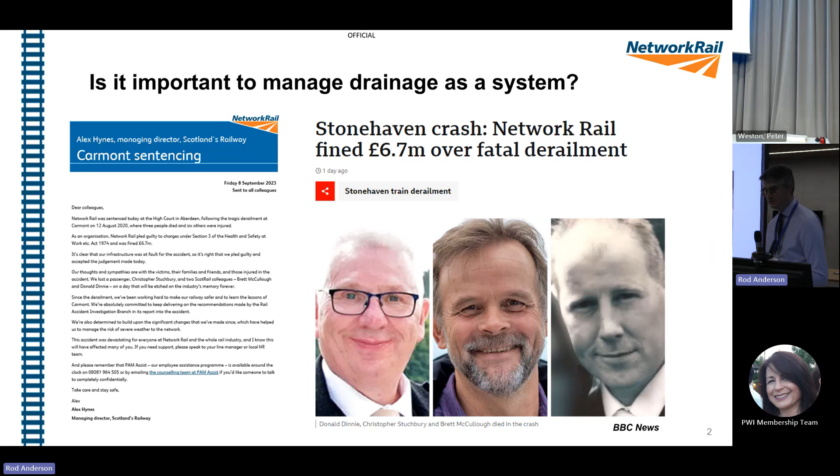So the accident - unfortunately, train 1 Tango 08, which was an HST travelling between Aberdeen and Glasgow, hit a pile of debris. Now, I'm not going to go into this because we are running slightly shorter on time, but the crux of it is 3 people lost their lives. The train derailed on material that had washed out from a drain.

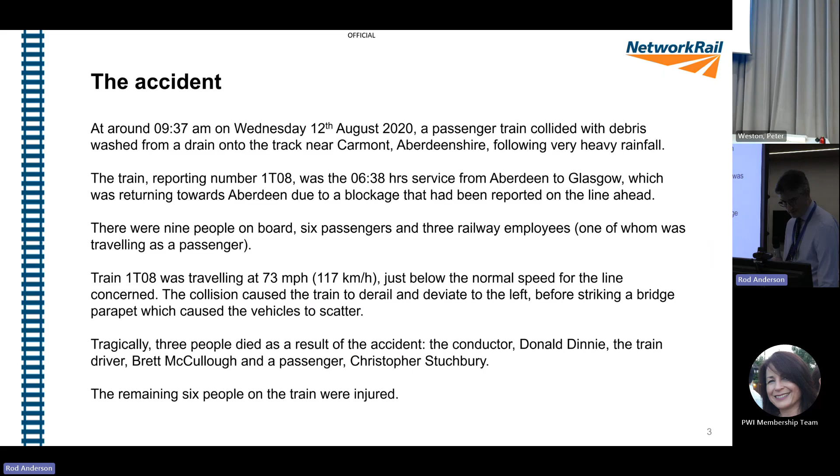So an area of the asset that's close to my heart - drainage is responsible, and it doesn't... I'm not proud of it, and it makes me awkward every time I think about it and talk about it. And it should remind us that it is really, really important that we manage the drainage asset properly. We inspect it, we maintain it, we renew it.

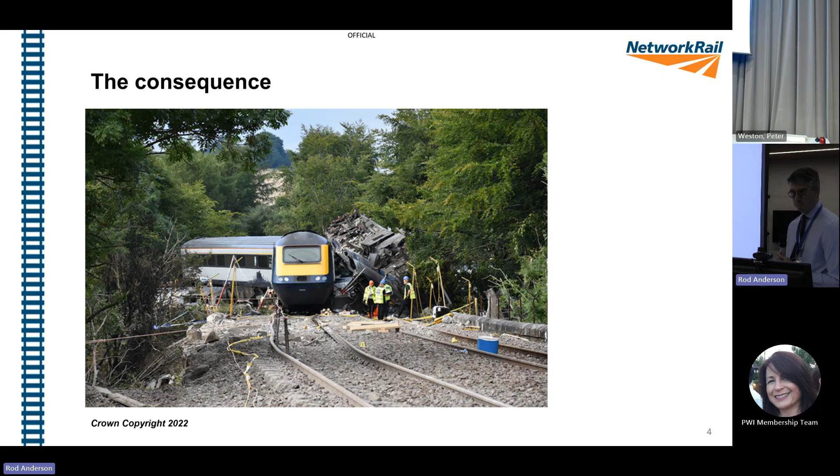So this is the power car, the rear power car. You can see what happened there. We had a couple of pictures earlier in the ORR presentation. That's the train in several bits.

It derailed on something that was relatively small. So you think, okay, we got the track there, we got the 2 rails, couldn't have caused that much damage. You notice in there that we've got ballast on the right-hand side, which is the coarse granite material that holds the track together and provides the support. And we've got smaller stone in the middle, in the four-foot, the middle of the track as we call it.

That is all of the shingle, that's the pea shingle, the pea gravel, that's come from the drain. That was at the top of the cutting. So the whole accident, the whole loss of life, the whole problem here is shingle that washed out from a drain. That is something that I'm not proud of, but it's something that we must talk about and we must share.

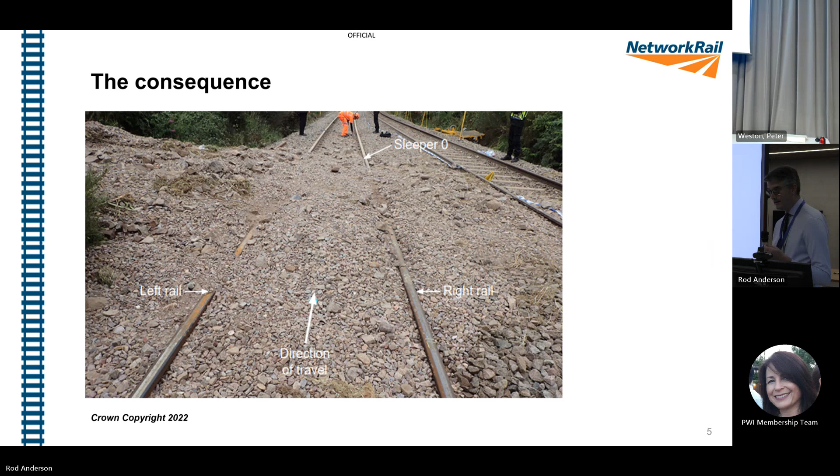And if it encourages you to go into a career in railway engineering, drainage systems, drainage asset management - doing all of those things right, doing the things that we heard about at Lewisham, correct maintenance of the geometry, correct inspection regimes, having things in a register - they stop these kinds of things happening. So really, really important.

That is what the scene looked like when the RAIB turned up on site, about an hour after they had the report of the derailment. You can see just how much material has come down from the top of the cutting slope. The driver wouldn't have stood a chance. They would have come around that corner and hit that debris. So it is really, really important that we think about the whole system.

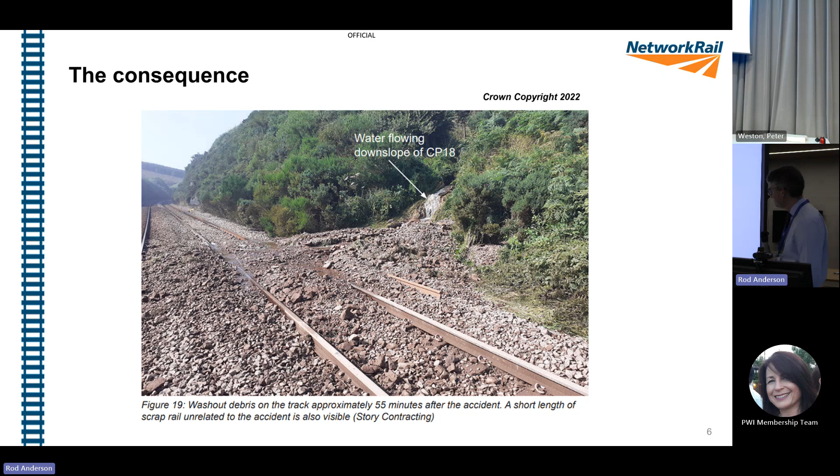I'm just going to go through a couple of the key engineering details because we're a room of engineers, hopefully. Same in Sheffield.

We had a drain installed by Carillion, no longer with us, in 2011. That had been installed not in accordance with the design. We often think about designs, and we had AECOM, we've got Atkins in the room, consultancy firms that do proper verification. They look at levels, elevations, all sorts of things that help us manage the railway system safely. This drain, for reasons that are now known, hadn't been installed correctly. So we ended up with material on the track. We had a very steep section at the top of the slope, and that ended up with material down on the track.

Designs are great, but we've got to take that ethos of looking at the system, understanding all the various elements and parts of that, into the construction.

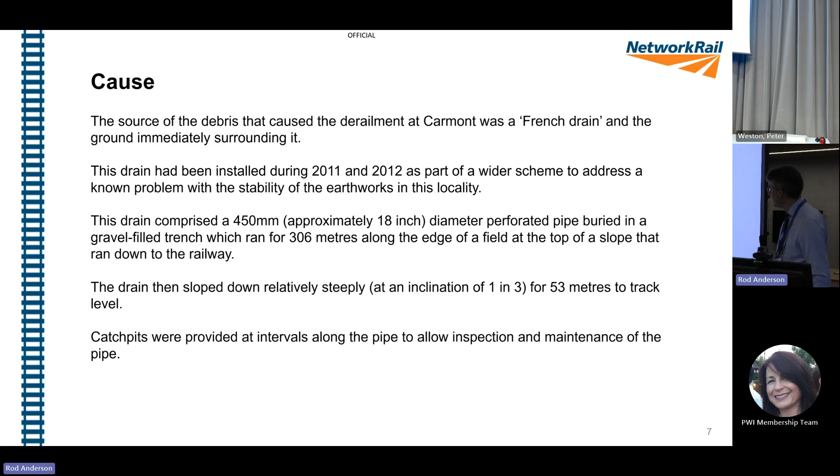So if anybody gets involved in construction, the next slide is really quite hard hitting. That is what they found at the interface between the top of the drainage system and the slope where it went down to track. Now, you'd think that's been under granite, ballast, shingle, in the slope - no one will see it, right? It's buried, yeah? No problem.

That's now in the RAIB report. That's been seen by HSE, ORR, just about everyone in this room, everyone in Sheffield.

If stuff changes on site, we've got to make a point of recording it. Change is inevitable in life. Today, this event, we've had to move the speakers order around a little bit. Things change - that's okay as long as we communicate the change. So if I could implore everyone in this room and in Sheffield, in your careers, whatever happens, whatever designs you get involved with, whatever construction work you do, whatever assurance you do, make a record of it. And if it changes, it's okay, we just got to record it.

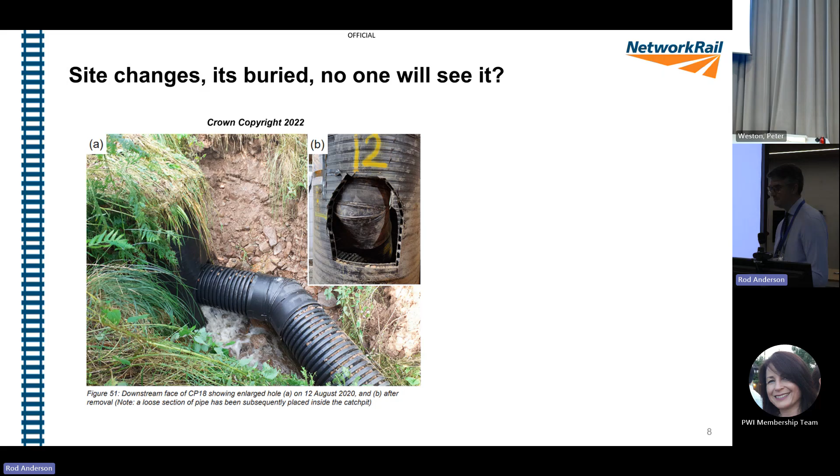It's really, really quite sobering. But all of these things that I've talked through in the last couple of minutes are things that you can take forward into your careers if you choose rail, and I'd encourage you to do that. These are things we can take forward and we can make a difference. We can change things. We can stop these things happening.

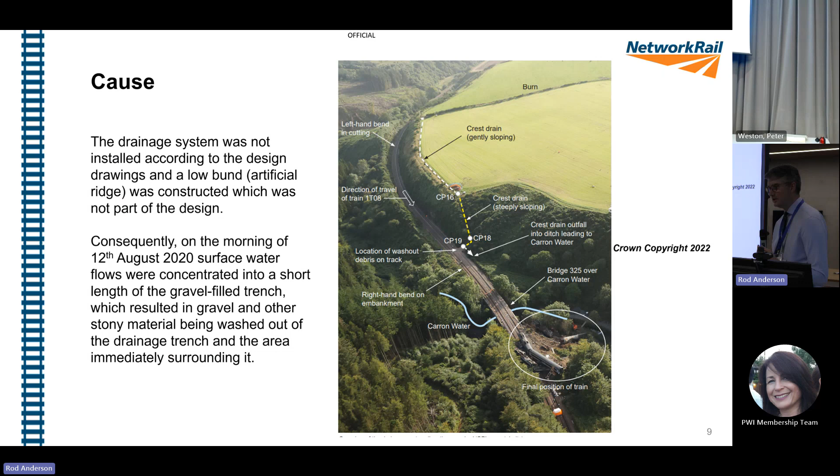RAIB, we've heard RAIB mentioned. If anybody wants a bit of CPD, anybody wants to look at learning from things that have happened in the past - and that's what I encourage you to do - Rail Accident Investigation Branch reports are a really good thing to do.

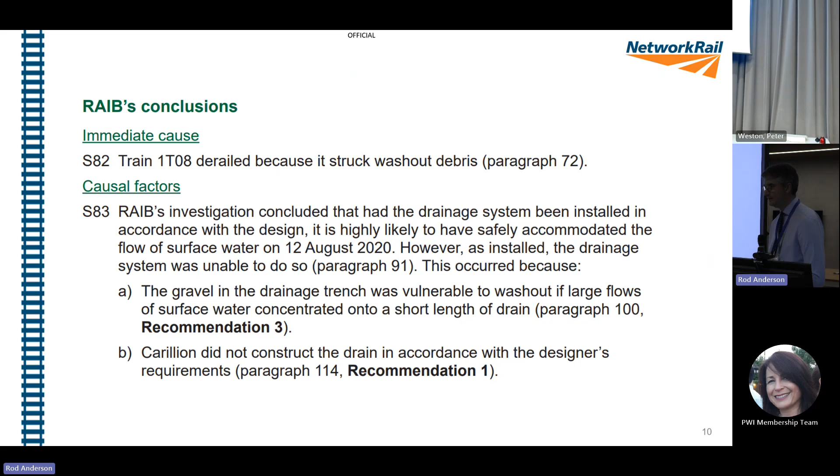It struck debris - that's the outcome of this investigation. It struck debris. So we installed the drainage system incorrectly, and Network Rail wasn't inspecting all of that drainage system. So really, I'm going to focus on one area that's so close to my heart, and I talk about it all the time: the system.

So we talk about drainage - I've talked about drainage for a few minutes now. We've had some track engineers in the room, that's great. We fail sometimes as an industry to think about the system. So what we've really got to focus on, and it's why I'm here, it's one of the reasons I talk often about this, and it's why I'm a member as well - this is the big picture. There have been workshops done on this, but we've got to think about the system. So if you're a track engineer, your interventions could have a huge impact on the earthwork.

Vice versa, if you're an earthworks engineer, your interventions could have a huge impact on the drain, on the track. So we really got to think about the systems interface. When we do that, I think we're on to a winner. Systems are really important to me.

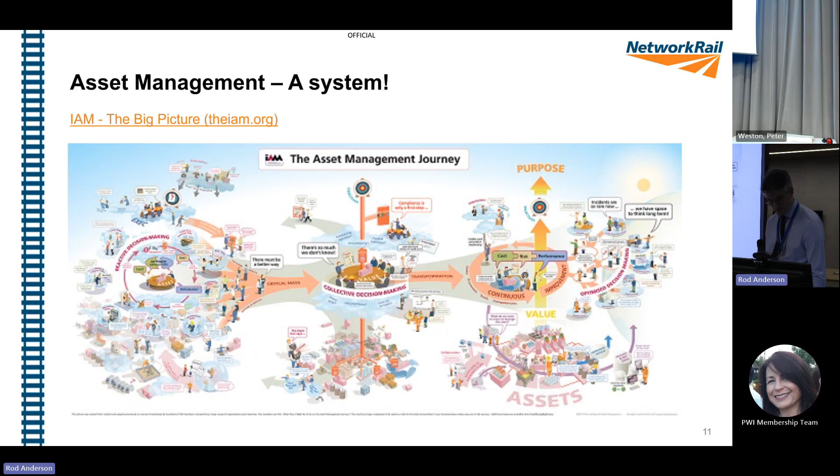I just wanted to share a few pictures from what we do, a typical day in the life. Brian was asked earlier what a typical day looks like - this is perhaps my version. That picture on the right is a drain. Believe it or not, it's full of ballast. It's collapsed. We had to find it.

We've got these lovely new machines that make stuff a lot easier. We did do an awful lot - even 10 years ago we were doing a lot by hand. We're now doing much more in terms of mechanization, which helps manual handling sufficiency as well. The ORR, as you heard earlier, want less money, less time, less access. These kinds of machinery can really make a huge difference to what we do.

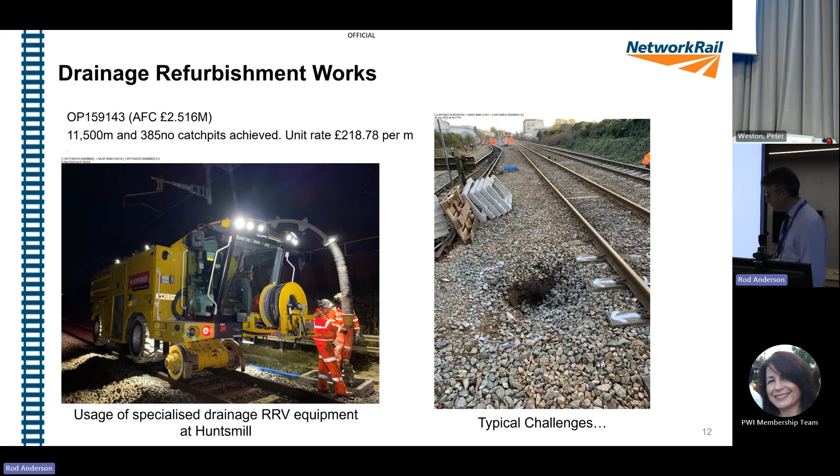And renewals, of course - we have an aging infrastructure, we have to renew things. So this is just a couple of examples of where we put new drainage in. Kind of gives you some idea of the cost there, just a broad brush - 708k for one of these jobs.

So we're spending that money that the ORR agrees with us in the determination wisely. It is a challenge on occasion - we have limited access, we have old infrastructure, we've got designs to do. These were designed by AECOM, by the way, just a plug there.

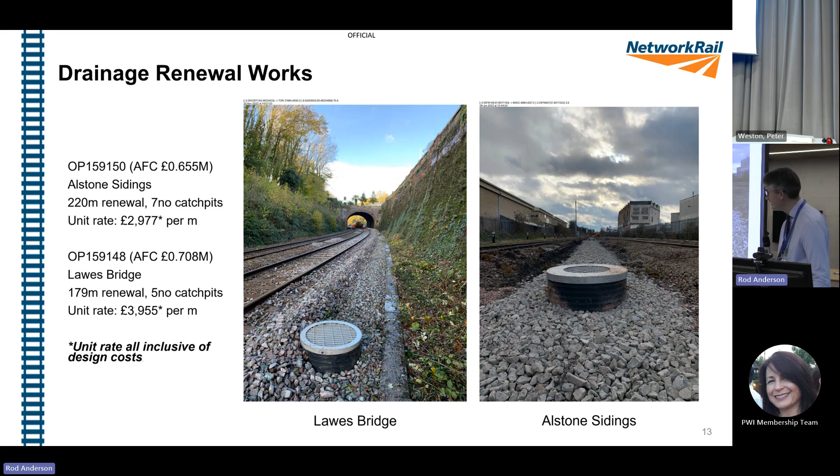The last thing that really gets me, and it's where I started - I've been in this role for 12 years. Three years prior to that I'd been doing drainage inspection, drainage maintenance, track maintenance. Maintenance is absolutely the first and last line of defense, and we forget the importance of inspection and maintenance at our peril.

So there are track engineers in the room here, and there are people in Sheffield involved in maintenance in some way, shape or form. Spending some time in maintenance at some point in your careers, whether that be railway or somewhere else, it's worth it - it's a real eye-opener. You get very limited chances to do stuff, but you can get stuck in.

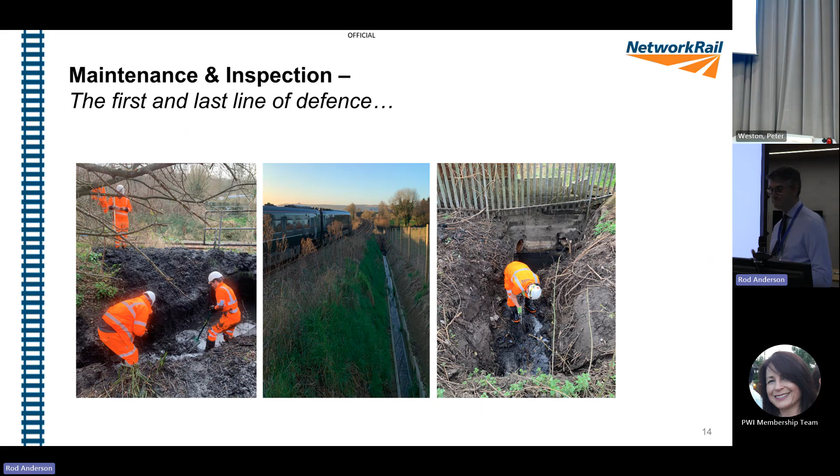That was just a little run through of Carmont, a reminder of why it's important to manage drainage as a system, and a bit of my background. Happy to take any questions - there's a couple of videos on the back of there.

Thank you very much, Mark. Thank you. So I don't know if we've got any questions here - first of all Stephen, please, from Sheffield. No questions here, so I don't know if we've got any questions in the room. I think we've lost everyone. Have a question from Greg?

Sorry, in CP7 - has the budget gone up for drainage renewals, improvements and maintenance? It has, yeah, substantially. The focus from the business, from the ORR, from others has been that actually we've forgotten this thing called drainage, so we are about 30% more in CP7 than we were in CP6.

It's never enough, we need more, but the biggest thing we've seen is a change of tact from reactive to proactive. It's not everywhere, it's not possible - we're not funded to do proactive interventions at every site, but there are more and more sites where we're proactively intervening. Money in terms of renewal spend has gone up, so that's a huge positive, and it's one of the reasons I've hung around. I want to see this through, I want to see the journey. It's a great place to work, there's a lot of money in drainage. So yes, it has, Graham.

So our penultimate presentation now, we've got two speakers from a completely different discipline. Some of it is related to civil engineering, but most of it is about electrification. So we've got Simon Skinner, who is the engineering director for SPL Power Lines, and Lucy Clark, who is a recent graduate with a few years experience now since graduation. They are mostly going to be talking about their experiences on Midland Main Line.

Okay, thank you, Simon. Joan. Yeah, hi, the slide's just coming up. So to introduce myself, thank you Joan. I'm Simon Skinner, I'm engineering director for SPL.

I've been with SPL for 7 years. I've been working in the railway industry for about 25 years, I am that old, pretty much just in electrification. So I started off in a design organisation, then got bored and moved into construction, then went back to design, then went back to construction. I've ended up delivering multiple projects in my career. The current project that we've just delivered is about 200 million.

My first senior role as an engineering lead was what's called a CEM, Contractors Engineering Manager. I entered into service about 320 million pounds worth of electrification, and that's a complete rail systems project. So that's...

Right, anyway, he's got the slides up. So that's me. I'm a chartered engineer through the IET. I'm also a fellow of the PWI and a fellow of the IET. And Lucy's going to introduce herself later when she gets to her slides.

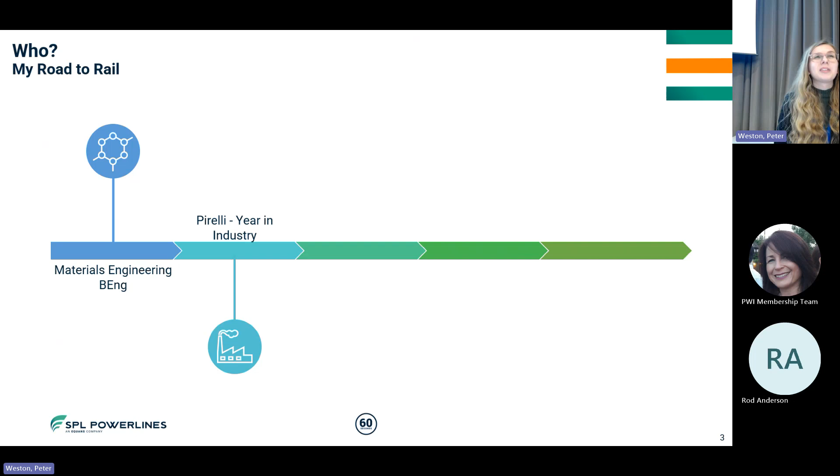As part of my course, I had a year in industry placement and applied to companies recommended by my university. I worked at Pirelli Tyres for a year in one of their rubber mixing factories as an efficiency assistant, which involved looking at production data to work out where we could reduce lost time. Although I wasn't particularly a fan of the industry, I did enjoy the nature of the work.

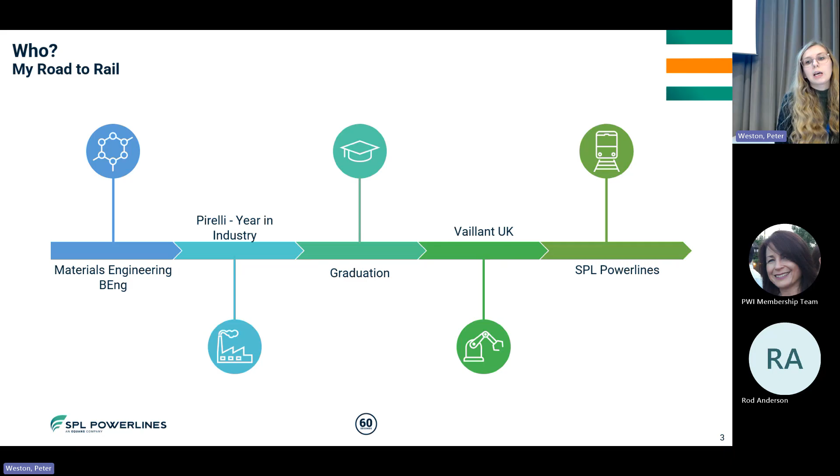I went on to graduate in the middle of COVID, so I was looking around for jobs and found an opening at a company close to me, Vaillant, who produce boilers. They'd introduced a new robotic cell to construct boilers and needed CE marking, now UK CA marking, to commission the cell. I did that for a year and got experience in engineering assurance, which allowed me to apply for roles at SPL Power Lines, where I now work as an assistant engineering manager.

When I started in railway, I didn't have any idea what was involved in railway electrification. I had the general idea that it was the overhead line equipment, the OLE, that powers the trains, but I didn't understand there are so many interfacing disciplines involved. A few of the major ones are route clearance and track, which Simon will mention later - you often have to lift or move these to get the OLE wires through. There are also substations, which Simon mentioned, to power the rail, and some work in signalling, immunisation and signal sighting that I'll talk about a little.

In all these disciplines there are also lots of different areas you can work in. There are the design teams, which do all the calculations needed for the design of the OLE or the bridges, and the construction teams that go out and physically put these on site. There are loads of areas you can work in - environmental teams who do surveys and ecological studies and look at reducing carbon in projects. But I mainly work as part of the integration team, where we look at all the interdisciplinary designs and do interdisciplinary checks to reduce clashes.

We work closely with the information management team because they hold what's called a federated model, essentially a big 3D model which shows what the railway looks like currently and has all the 3D designs of the new infrastructure placed in. This is really useful for early clash detection, to make sure you're not putting an OLE mast in a trough route, or to look at potential risks like standing surfaces.

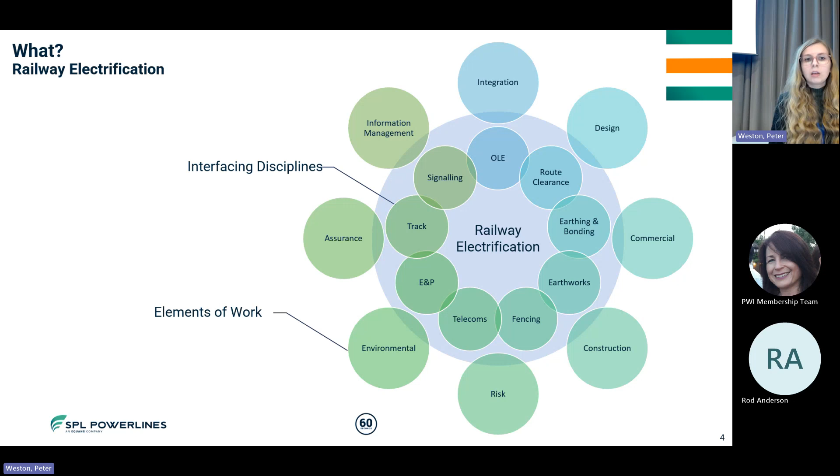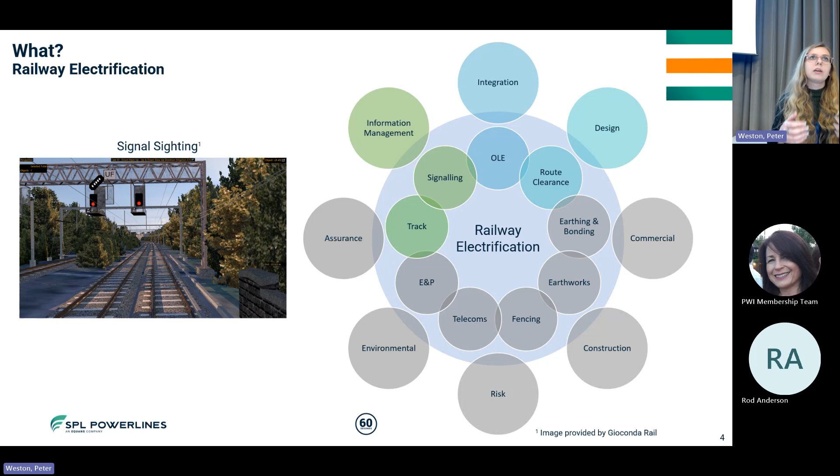One area I work in that we use this for is signal sighting. Drivers require a certain amount of time to see a signal to safely act on it. We run through the 3D model to check that new OLE designs or bridge moves don't impact the sighting of these signals, so it will still be safe to run when commissioned. This saves a lot of money because design changes can be made early in the process, and it reduces the number of people we need on site to do these checks at the end.

One other aspect I want to talk about is engineering assurance. Simon mentioned we recently commissioned the Kettering to Wigston stretch of the Midland Main Line. To do this we require a lot of engineering assurance - what we call Form E's and Form 5's - which show that construction has taken place in accordance with the design, or records any changes that have been made. This also shows that required quality checks and testing have been done to make sure it's safe. For this project and stretch of line, there was over 400 pieces of documentation. It's a bit dry and hard work, but by the end of the project it's really important, because you can't commission without it.

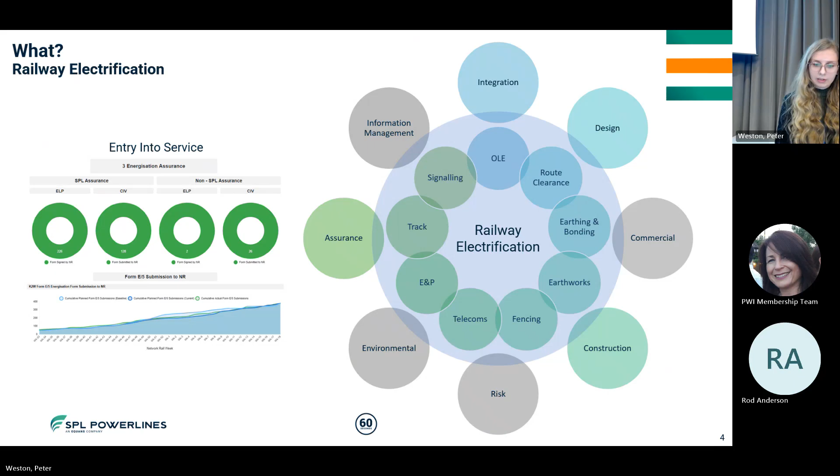I think I'm going to hand you over to Simon now to talk about the more interesting aspects.

Thank you, Lucy. I'll leave it on this slide - I think it's a real representation of the system, that whilst we have individual discipline specialisms, mine is overhead line, everything's interlinked. The drainage is associated to the track, the track's associated to the overhead line, the overhead line is associated to the E&P, the power and distribution system - so everything is linked to each other. Having a system approach is vital for the success of any major project.

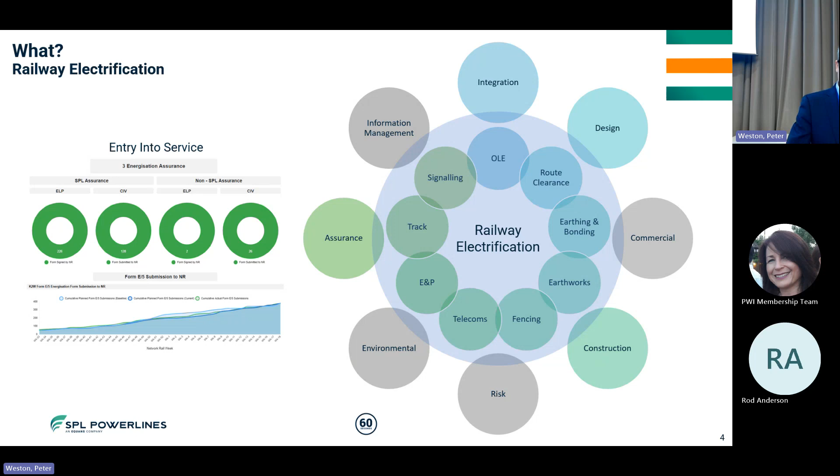The next couple of slides, I'm going to go through some work that Southampton University did with the Technical Authority on voltage controlled clearances.

Electrification costs a lot of money, and we've got no money. Steve earlier spoke about decarbonising our network. We've got about 10,000 kilometres worth of electrification to do, to electrify the rest of our network.

So what do we do to reduce those costs? 30% of cost is embedded in civil engineering work, so we're working on a Victorian infrastructure. Our metric in railway speak is an STK, single track kilometre, and that varies between £2 and £5 million per STK. It costs between £2 and £5 million to actually put wires on our infrastructure, and it all depends on the complexity and where you are in the infrastructure. So Sheffield, for example, high complexity, high cost.

So what can we do differently? We simply can't get the overhead line through the bridges, and that's a problem. We can't just not have overhead line there, particularly if we've invested heavily in rolling stock that works off 25,000 volts. We could increase the height of a bridge - that's quite costly. We could lower the track.

That then interfaces into Mark's area of drainage. It interfaces into track - you lower the track, you're creating a low spot, and you've got to deal with the drainage. Drainage becomes a real poignant issue around track schemes. Again, costly, very disruptive to the passenger.

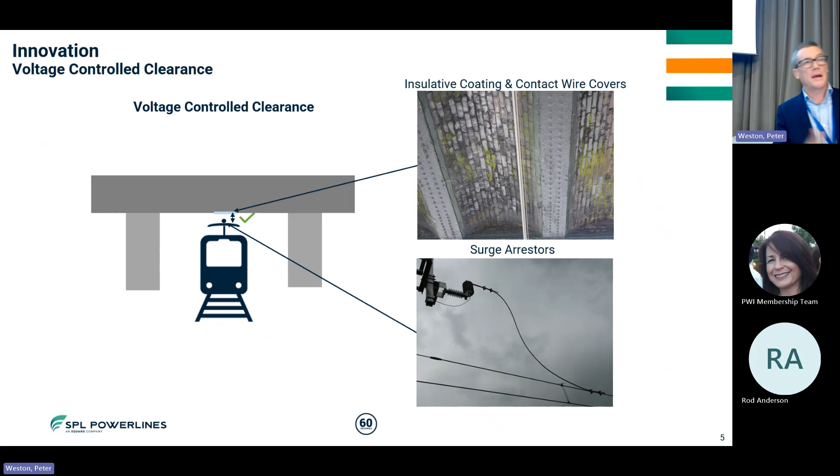The next couple of slides will go through some of the interventions that we use. We're using surge arresters, we're using insulative coating, and contact wire covers. So we're fundamentally reducing the gap, the electrical gap between the earth and the 25 kV, allowing less bridge interventions, which basically means more electrification.

This is an example, Midland Main Line, where we've applied this process. So this is very theoretical - it's then gone into a code of practice, into Network Rail, and we've now fully implemented this on a number of different bridges on the Midland Main Line.

It's cost less, and people are happy - people being the public. If you shut a bridge, knock a bridge down, it annoys people. You've also got significant issues over consents, environmental - how does that bridge operate in the local area? You're cutting off threads to bring communities together. So doing an intervention without having to do a physical intervention to the bridge or the track is always good.

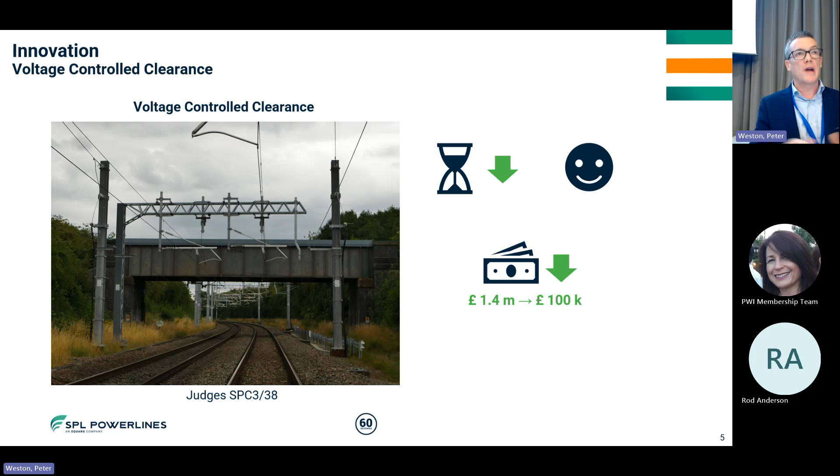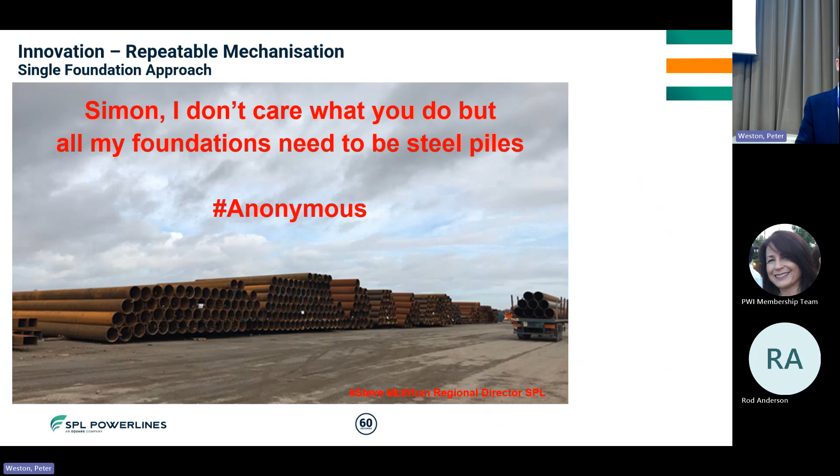We've put in about 3,500 overhead line foundations on Midland Main Line so far - that's over roughly about 300 single track kilometres. That's quite a lot of foundations, a lot of tubular piles. And that picture there is actually taken by me somewhere near Grimsby, I think. All these piles here are now in the ground, fully installed.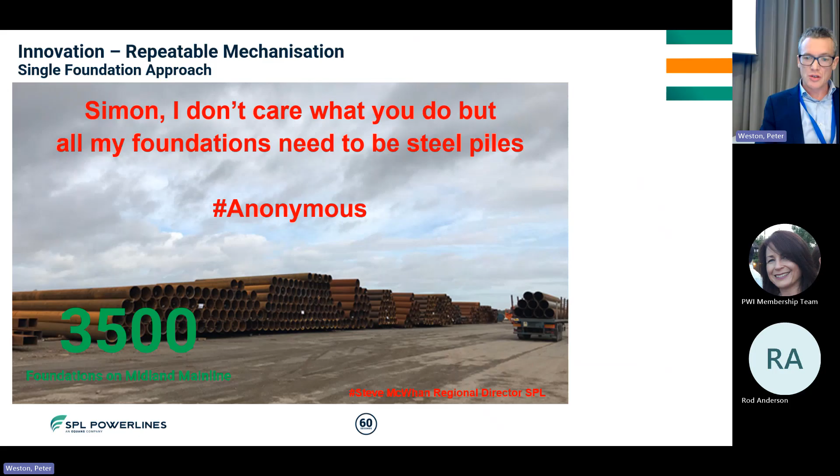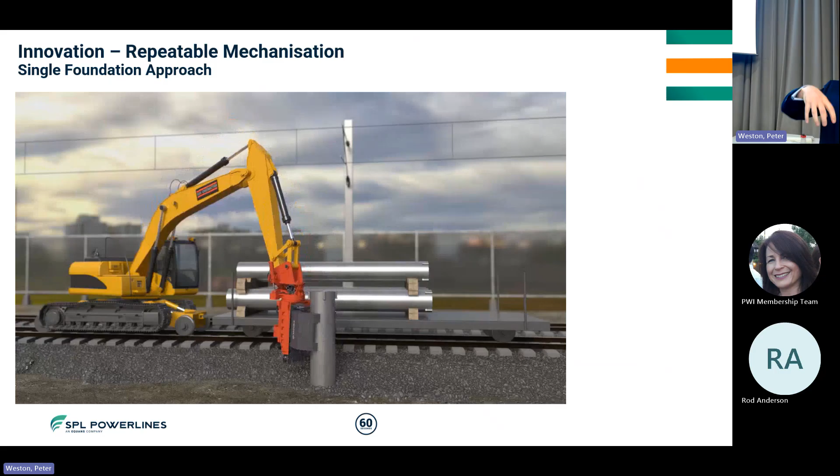Hopefully you can see the video - this is our preferred method. I'm not too sure if you've seen something like this before. This is a 610 tubular pile, like a pipe, that's vibrated into the ground until it reaches a natural refusal. At the top of the pile there are connections where you land the overhead line mast, so this is all part and parcel of the design requirements that we're also doing. When it hits refusal, this is the noisy bit - a hammer comes up and smashes it home.

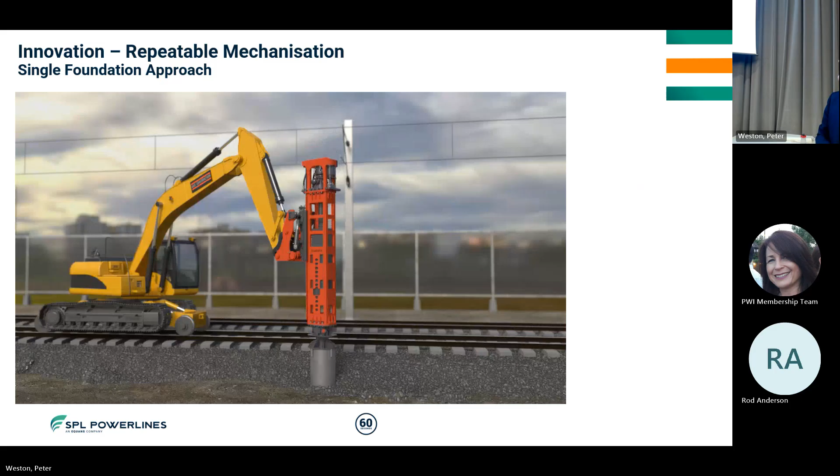So for context, it's about £3,000 to put one of those in. The next couple of slides are going to go through some alternative methods we've got where we use CHS technique, but using different techniques to go through difficult, challenging geology. But for context, for a 1 metre concrete auger, which is a foundation, wet works, it's about 15 grand. So the differential is stark.

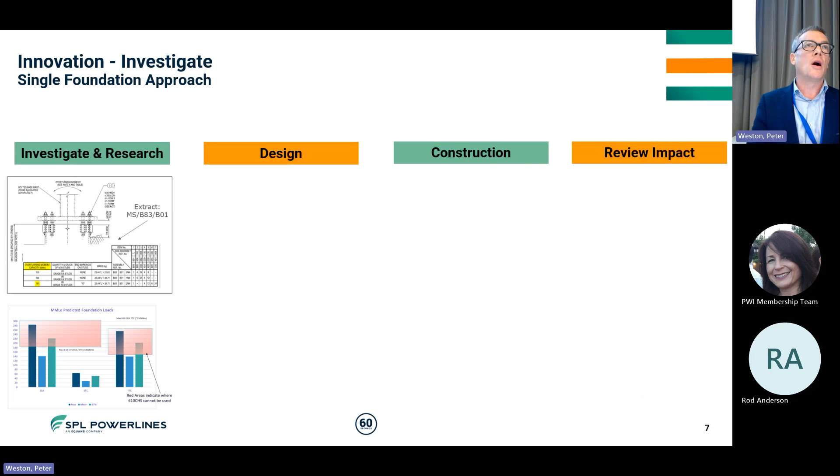So part of my original specification about understanding and requiring a single foundation approach, we had to investigate whether or not something was feasible. So we looked at, I think, 1,000 if not 1,500 examples of structural loading on the northwest electrification and determined where the structural limits would be - the maximum, the minimum and mean. We then determined that actually about 20 or 30% of the structural loading we're likely to get will be outside the maximum permissible zone of a standard 610 pile. So we then had to think, well, how do we do that? What do we do to design that out?

How do we use the 610 and design out the issue around the connection? So we designed a cap, a secondary pile cap in essence, where we removed the connection and created a cap that sat on top of a 610 CHS. As you can see, that increased the foundation threshold by about 30% in terms of loading criteria, which meant I can install more 610 foundations in more places.

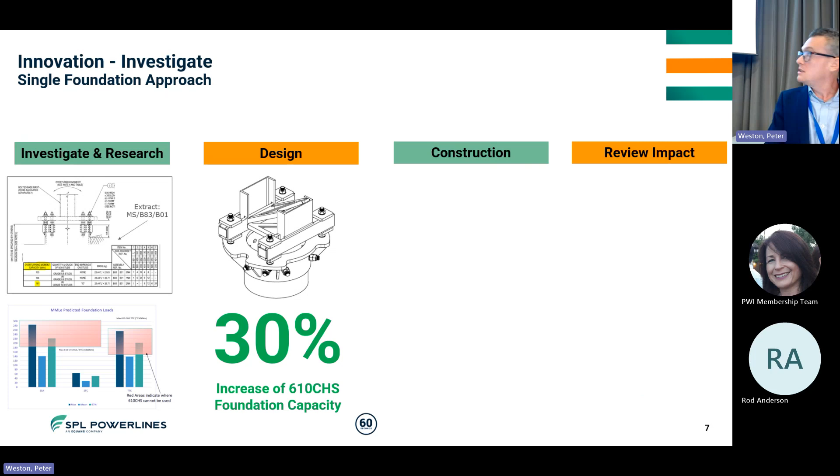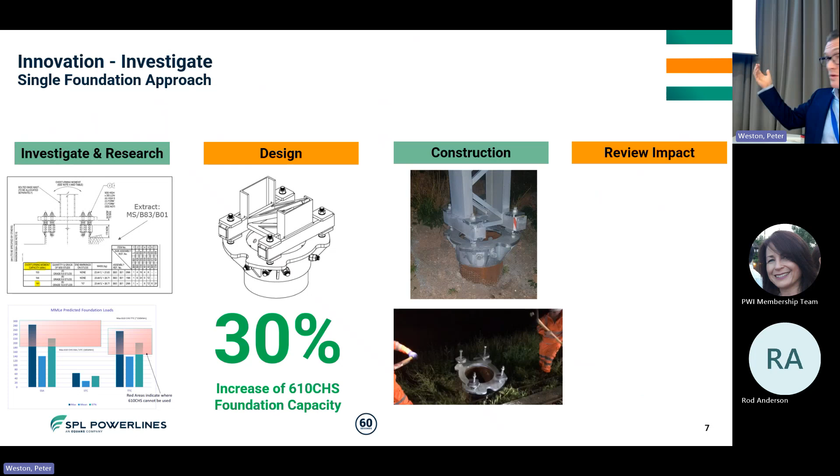But it came up with its problems, right? We were doing this at the same time as design, at the same time as construction. The top is an example of the pile cap with an overhead line structure on top of it. The bottom is actually an example of the pile cap sitting on a 610 with a snug fit, and the teams there are trying to squeeze it on. So we were developing and innovating at the same time as construction - always difficult - and we always come up with problems with research and development.

But the pain was worth it. We had a 50% reduction in our foundation program, and we managed to go from about 60% CHS to about 93%, which was industry leading at the time, and now everybody's following suit. What it meant was we were doing the same thing, repeating night after night after night.

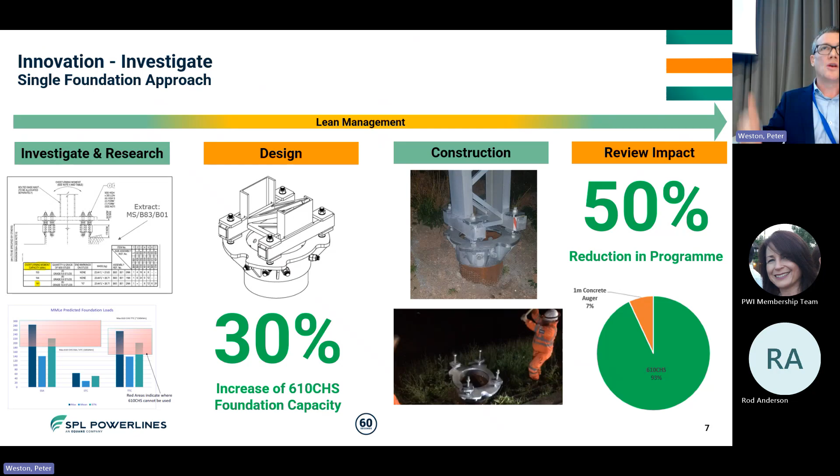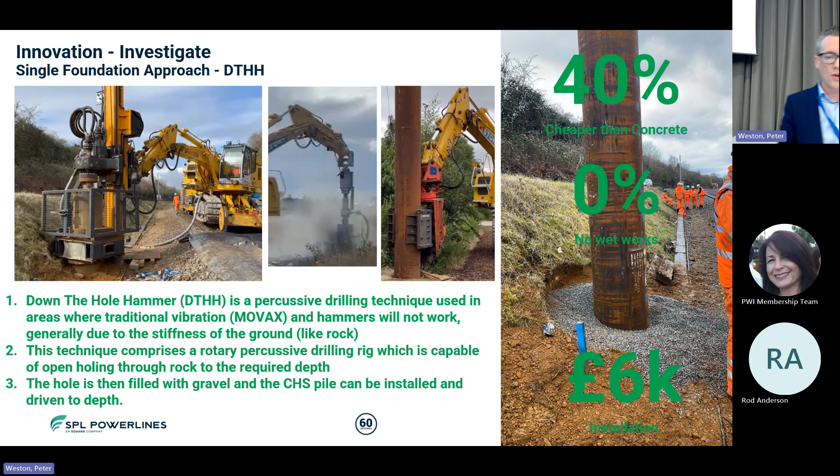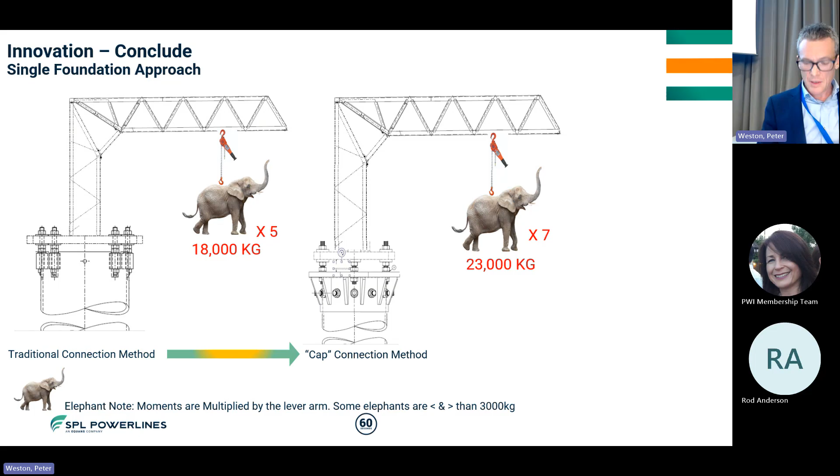So, in conclusion, the original pile had about 181 kilonewton metre overturning moment, equivalent of 5 elephants. We moved that to about 230 kilonewton metres, or 231 to be precise, which is about the equivalent of 7 elephants. So we're increasing our loading capacity on our foundations by about 30% by introducing a secondary pile cap, which yielded a huge efficiency in the project and was one of the first projects that was built on time, on budget, particularly through COVID.

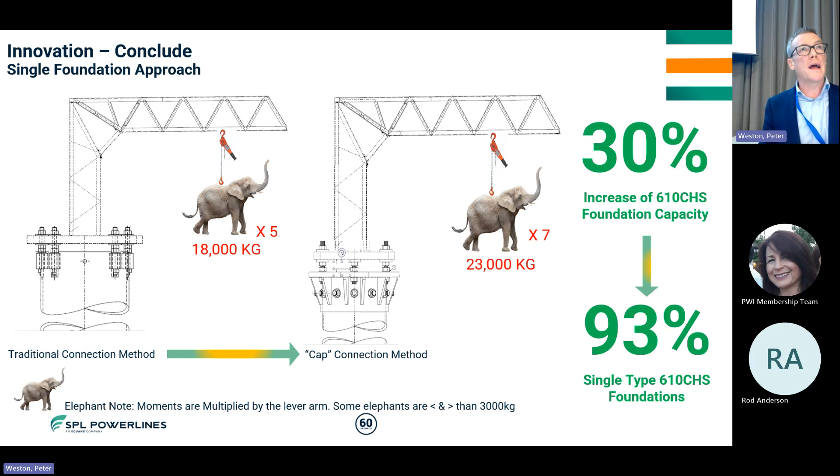So we're trying to take this on to the next level, a next level of innovation, which is quite difficult, but there's always things that we can do, and we need people like yourselves to come in with fresh ideas to think about how we can do this better, with more sustainable materials as well. That's it. Thank you.